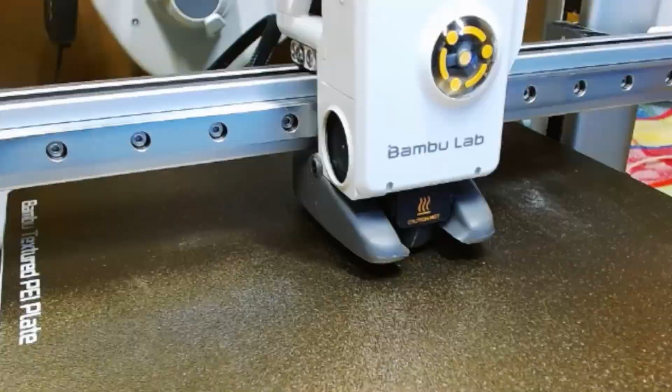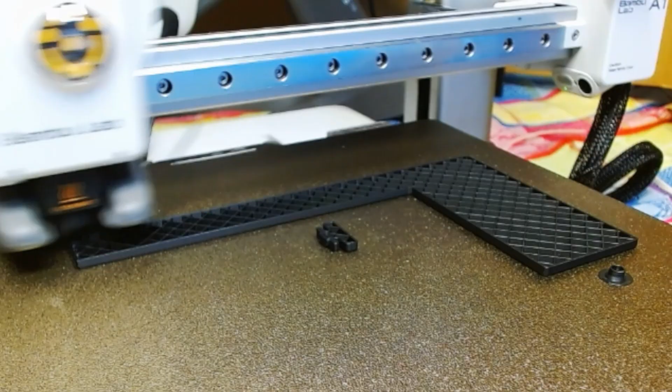I was talking with my brother the other day about how difficult it is to show a 3D printer print on video. At full speed, everything is moving too fast to really understand what's happening. Mounting the camera to the printer bed fixes that. Now the print head is the only thing that looks alive.

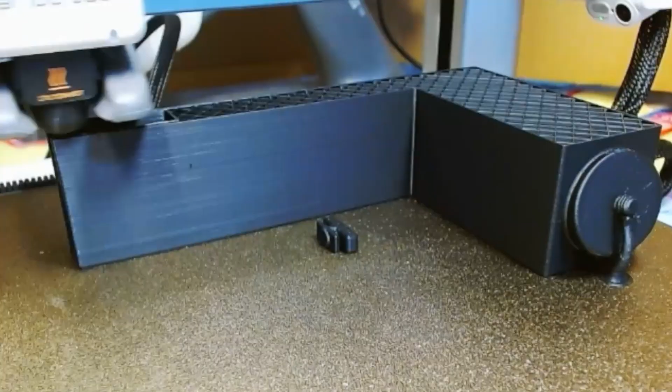On the Bambu Lab A1, a pin slides into the front left underside of the bed. The mount slides into place. The pin holds it there, and friction does the thinking. No force required. That detail sets the rules. So before designing a camera mount, I designed a question. The first version isn't about the camera at all.

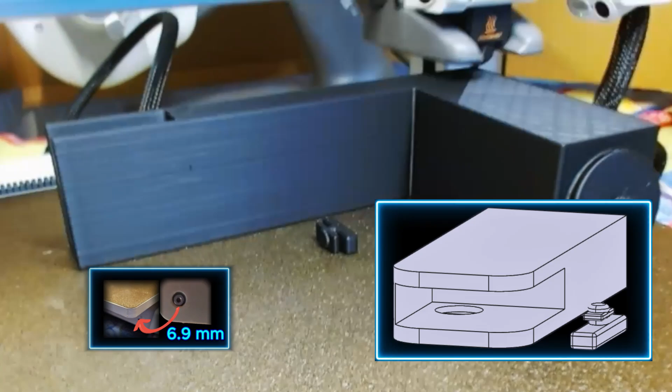It's just a box. A simple rectangular base with a slot along the front edge. That slot is the experiment. It exists to see if the part slides in cleanly, locks into the corner the way it should, and stays put once the bed starts heating and moving. No angles, no adjustments, no camera in sight.

This print is fast, disposable, and brutally honest. If it fits, we move forward. If it doesn't, we learn why. Because in good design, you don't start by adding features. You start by making sure the part belongs exactly where you're about to put it.

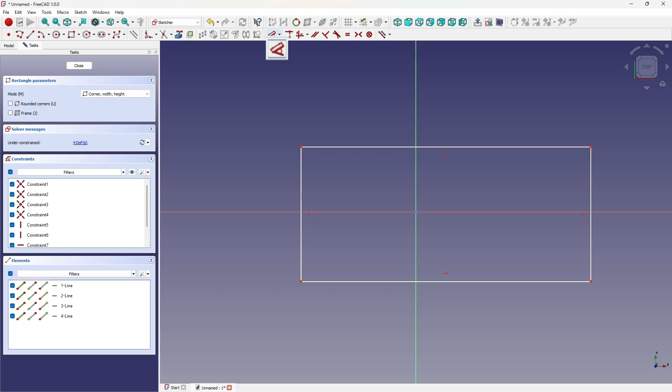We start with a rectangle, but not just any rectangle. This one knows where it lives. Centered on the origin, anchored to the axes, calm and intentional. Nothing floats, nothing guesses. Every corner is invited to the party by symmetry, not by chance. Then comes the first decision that matters. One number to rule them all.

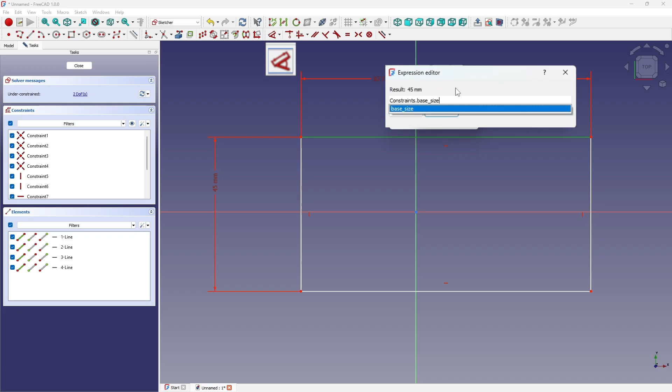45 millimeters, not because it's magical, but because it's named. The moment we call it base_size, the sketch stops being geometry and starts being a system. From here on out, everything listens to that value. Width isn't typed, height isn't remembered, they're derived, quietly, reliably. Expressions slip in next, not flashy, just precise. 2.5 times the base.

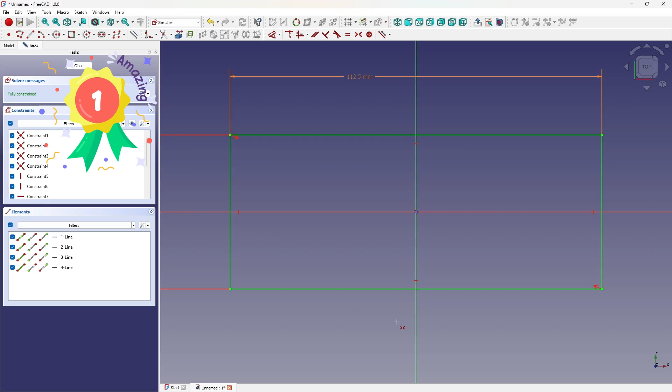Dimensions stop being measurements and start being relationships. You're not drawing a shape anymore. You're defining behavior. And then the sketch stretches. Cleanly. Predictably. The top edge reaches its full span, perfectly centered. The solver nods. Still green. Still happy. Now we soften it.

A corner gives way to an arc. Not decorative, but deliberate. Tangent on both sides. Radius tied back to the same shared language as the rest of the sketch. No rogue numbers, no one-offs. The curve belongs here because it fits the logic, not because it looks nice. More expressions, same story. The radius isn't chosen, it's inherited.

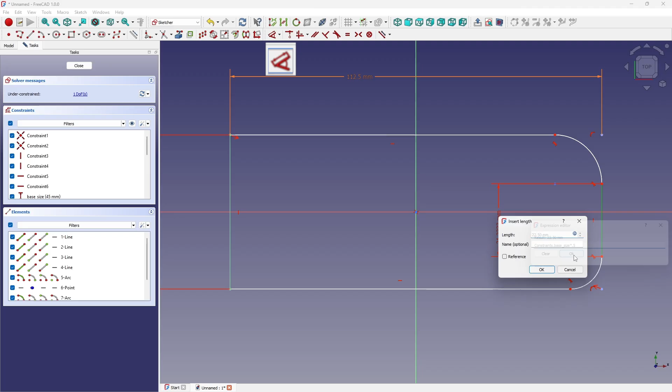A few red arrows flash as constraints fall into place. The sketch resists for half a second, then yields. Everything locks. Degrees of freedom drop to 0. And there it is, fully constrained, not frozen, resolved. This is the quiet win moment in FreeCAD.

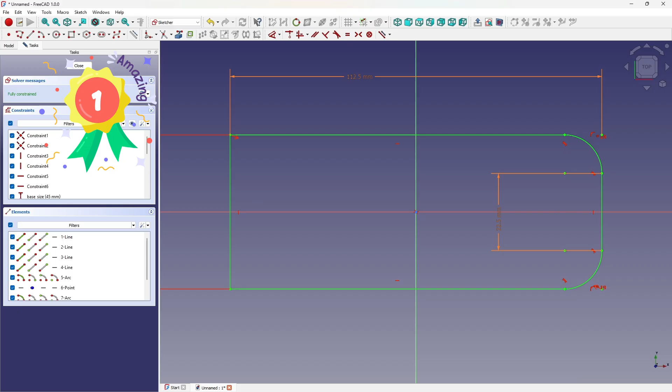When the solver says fully constrained, what it really means is, I understand what you meant. No guessing, no surprises later in Part Design. Just a sketch that knows who it is, where it is, and how it scales when you change your mind. That's not just drawing, that's design.

All right, now the block becomes useful. We start by giving the sketch some depth. Nothing fancy here, a straight pad, 22 millimeters, just enough mass to feel intentional, not bulky. This is the moment where the 2D logic finally stands up and becomes a real object. You can rotate it, catch the light. It exists now. But this isn't just a block.

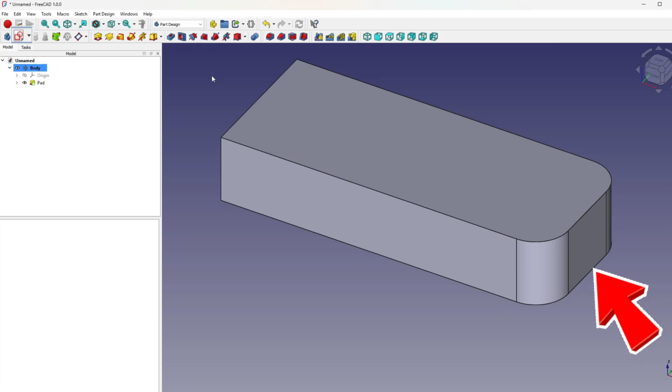It needs to dock. So we flip back into Sketcher, this time on the end face, the one that's going to meet the printer bed. We ground the sketch with external geometry. The moment the sketch opens on that end face, we pull the edges of the solid straight into Sketcher. They light up in purple, not as decoration, but as a contract. This is the handshake between sketch and solid.

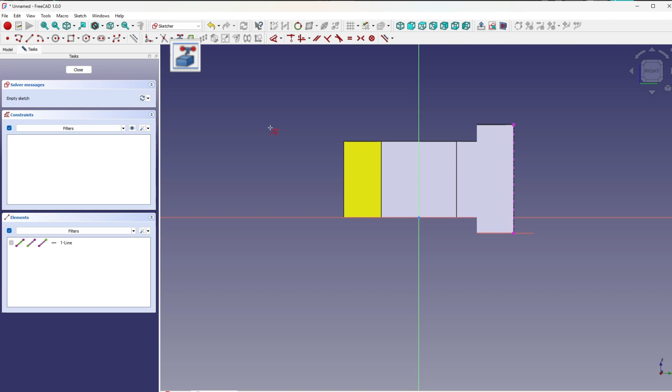From here on out, nothing floats, nothing drifts. The geometry is attached to something real. With those references in place, we draw the slot rectangle and attach it directly to the external geometry. Not eyeballed, not implied, constrained. The sketch isn't guessing where the face is, it's responding to it.

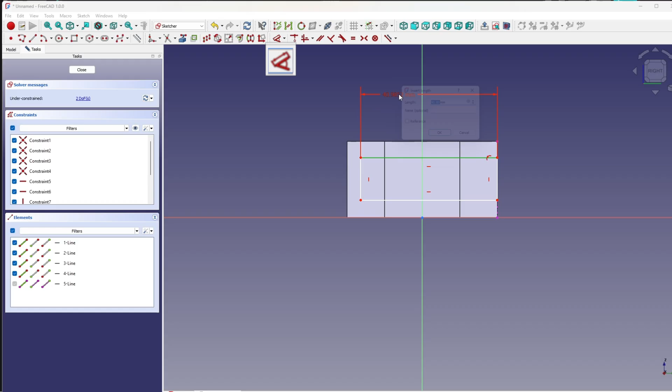Now we're ready to give the square some dimensions, starting with width. Width isn't measured, it's derived. Expressions pull it from the base value, keeping the slot in proportion no matter how the model changes.

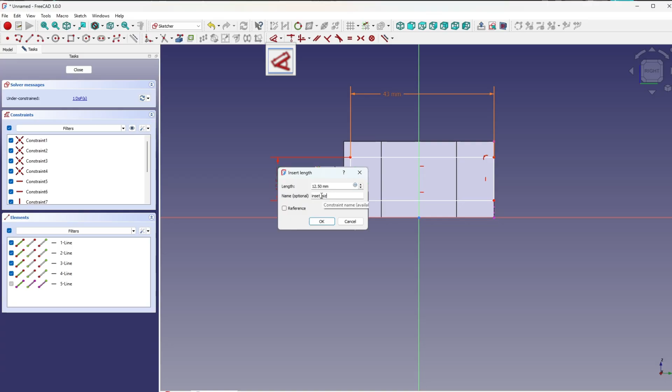The depth is where theory meets plastic. The printer bed is 13 millimeters thick, but printers don't care about theory. Plastic expands, layers stack, and friction always shows up uninvited. So we shave half a millimeter off and land at 12.5 millimeters. Snug, intentional, forgiving. Now we add a construction line.

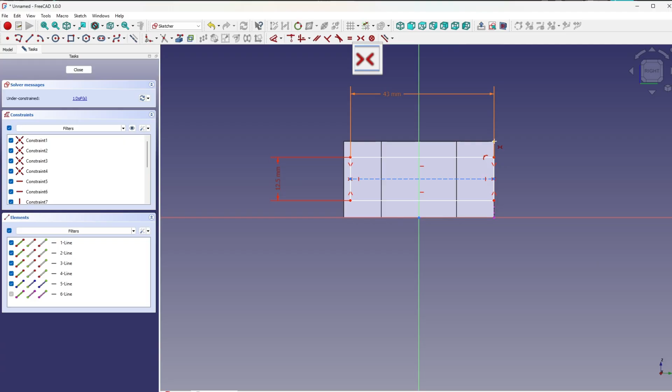Because it's created inside the slot rectangle, FreeCAD automatically drops it dead center. No extra constraints needed. It's already centered within the square. The only thing left to do is tie that center line back to the external geometry, so the slot isn't just centered in the sketch, but centered on the part itself. A couple of constraints later, the solver turns green, fully constrained.

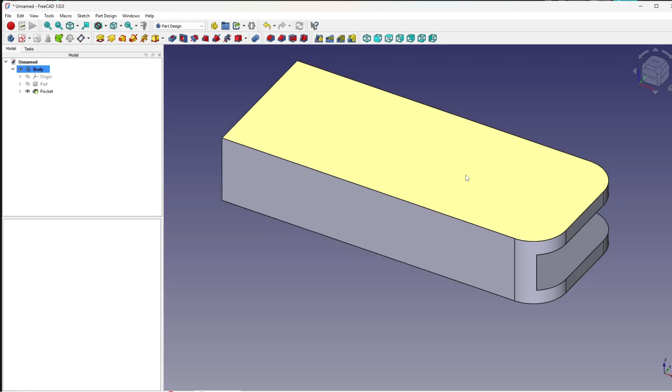Close the sketch and perform the cut. A clean pocket straight into the body. And when it's done, this isn't just a padded block anymore. It's a part with intent. A slot that knows its size, its position, and exactly what it's meant to hold.

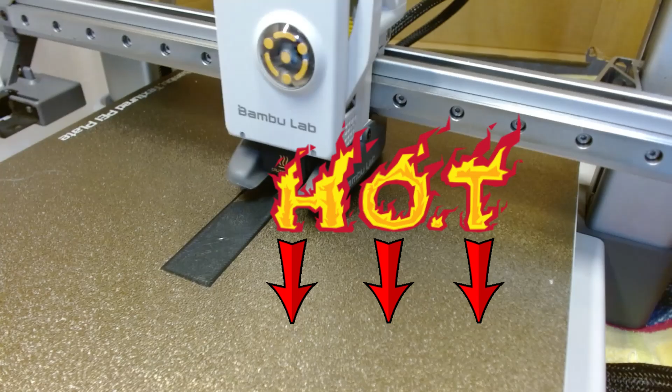After printing the test block, the experiment moved from theory to thermodynamics. The geometry was right, the fit was tight, the slot behaved exactly the way the model said it would. And then the heat made its entrance. Energy transfer was expected. A heated bed at temperature is not subtle. What wasn't anticipated was persistence. The bed didn't just warm the contact area, it fed it, constantly, patiently, relentlessly.

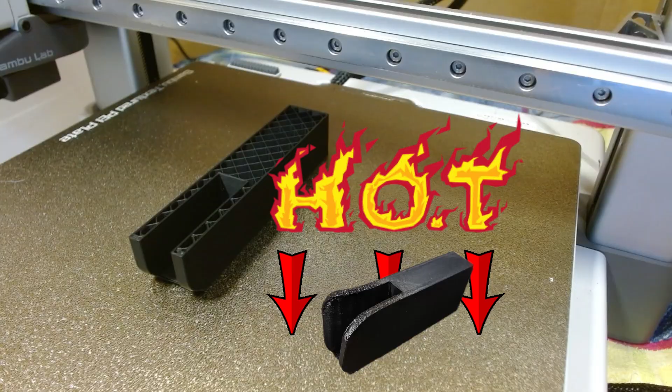And plastic, under sustained thermal load, tells the truth. The material softened beyond expectation. Cohesion weakened. Structural confidence faded. The edges didn't gently distort, they surrendered. Warping wasn't a rounding error, it was dramatic. This wasn't a mistake in measurement, it was a miscalculation in energy.

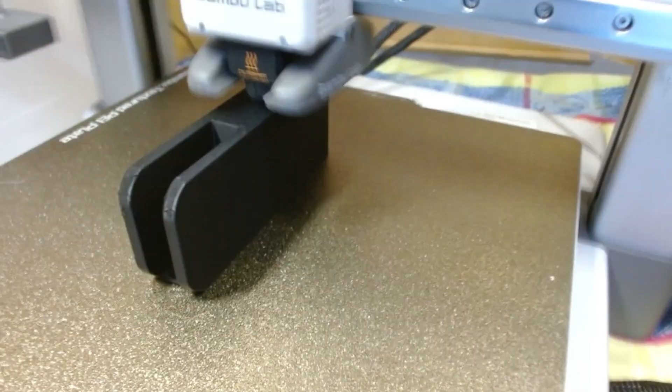The heated bed behaved like a thermal reservoir, and the mount became its conduit. So the solution wasn't tighter tolerances, the solution was interrupting the physics. The part was redesigned to include a deliberate cavity, a narrow channel sized for thin cardboard strips. Nothing high-tech, just cellulose standing between sustained heat and structural integrity. A thermal break, a pause in the energy transfer.

Same geometry, new understanding. With that small thermal break in place, performance shifted immediately. The insulation disrupted the energy flow. Rigidity held. Warping stopped being the headline. Stability returned. Because sometimes the fix isn't redesigning the structure. It's controlling the environment the structure lives in.

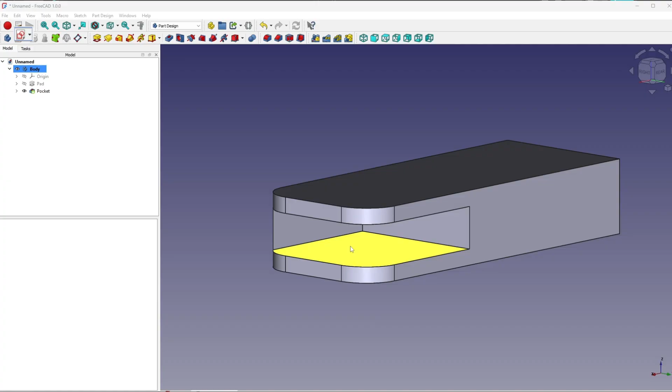Now that the issue has been identified, it's time to create the thermal break. A new sketch attaches to the lower interior surface of the cavity. External geometry comes in first. Front, back, and sides. Every edge is projected into the sketch as purple reference lines. Those lines define the cavity.

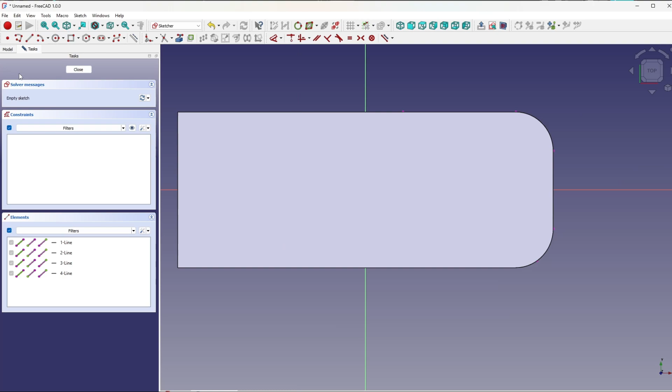Not assumed, defined. To make the interior readable, the body is temporarily hidden. One click on the visibility icon in the model tree, and the solid disappears. The view clears instantly. Just constraints and intent. Inside a cavity, clarity is control. The side edges anchor the insulation rectangle directly. The front and back remain as reference guardrails. Visual confirmation that spacing is deliberate and symmetric.

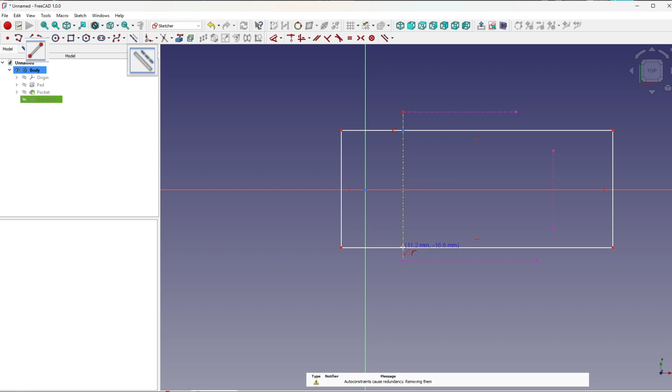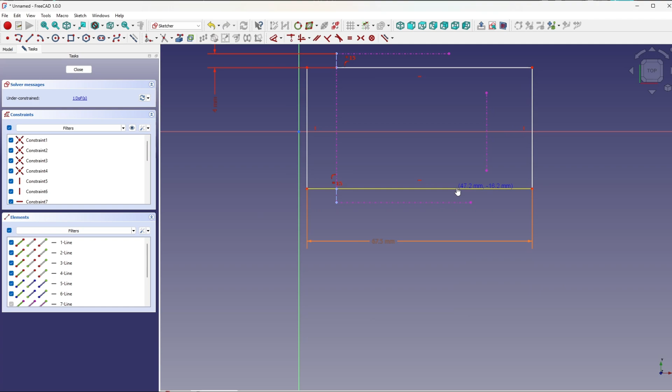Nothing floats. The insulation channel forms as a rectangle positioned 4 millimeters in from the cavity edges. The sides are constrained to the external geometry. Placement is deliberate, precise. Dimensions are expression-driven, tied back to the base size from the first sketch. One master value, everything else responds. Change the base, and the insulation adjusts automatically. The solver turns green, fully constrained.

A shallow pocket carves the first channel along the lower edge, just deep enough to accept a strip of cardboard. But this isn't a straight cut. A 45-degree taper angle is applied to the pocket walls. 45 degrees. Not decorative, strategic. That taper turns the channel into a wedge. When the cardboard slides in, it doesn't simply rest in place. It grips. It locks itself in through geometry alone.

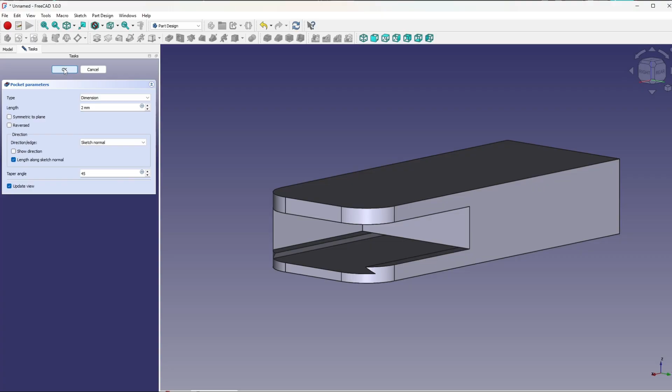This is one of those features hiding in plain sight inside the pocket tool. Most people use it to remove material. Few use it to shape behavior. That tiny angle transforms a slot into a retention system. Geometry with attitude. Once the lower channel is in place, symmetry becomes inevitable. Heat doesn't care which side it approaches from.

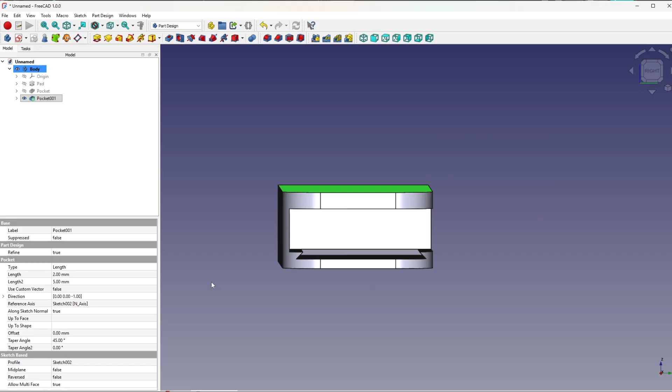In FreeCAD, mirroring requires a reference, an axis, a face, or a plane. Our feature does not sit on a global axis, and the cavity is internal, so there is no natural surface to mirror across. Rather than sketch the feature twice, we introduce a datum plane to establish a clean mirror reference through the part's center. One feature, reflected once, perfectly aligned.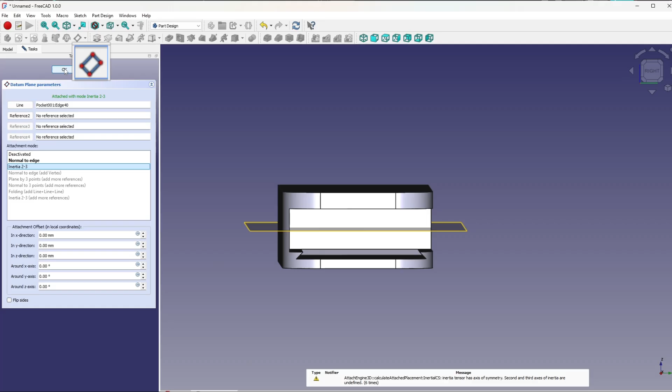My first instinct is to attach that plane using inertia 2 to 3. On paper, it sounds perfect. That attachment mode calculates the body's center of mass and places the plane directly through it, the true balance point of the part. We let the model find its own middle. Elegant, automatic. It is physics-driven, and that matters. The plane aligns to the principal axes of the body's mass distribution.

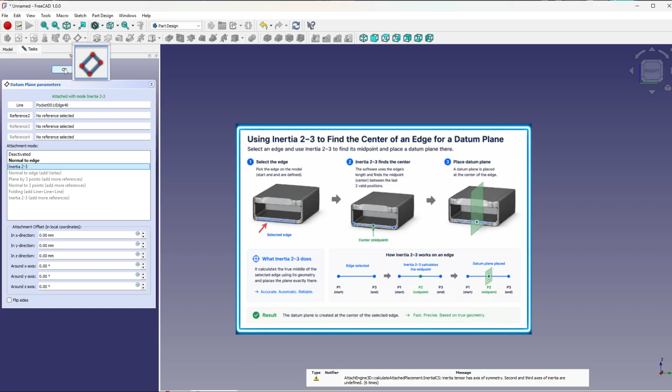If the geometry is perfectly symmetric, FreeCAD may display a warning that certain inertia axes are undefined, not because the plane has failed, but because symmetry makes some rotational directions mathematically interchangeable. The center location remains valid. In our case, that center is exactly what we need. The plane passes cleanly through the part. It serves perfectly as a mirror reference. Understanding what the warning means allows us to use the method confidently, rather than avoid it.

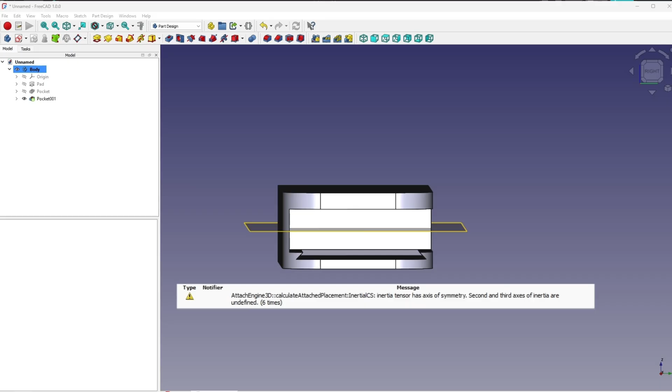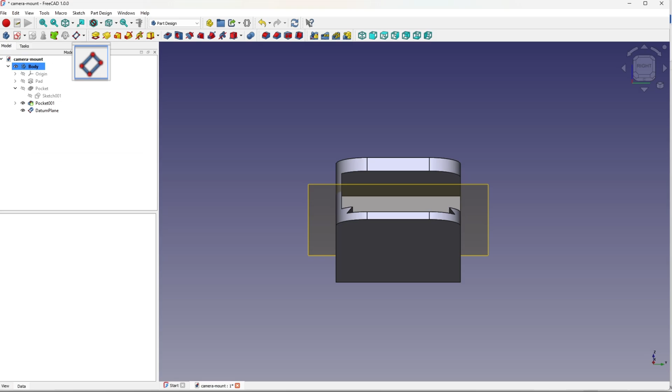Or, if you prefer to play it safe, the datum plane can be defined purely by geometry. We attach it to the bottom face of the base pad, drive its attachment offset with an expression equal to half of the base pad's length, then enable the flip sides option to center the plane. Now the model finds its own middle, not by balance, not by weight, but by the quiet authority of its governing dimension.

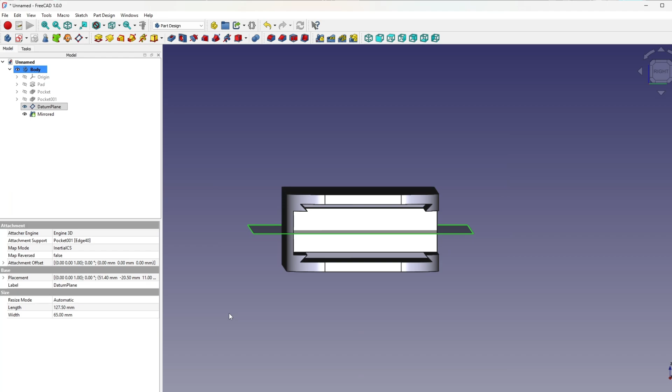Insulation channels now exist on both the top and bottom of the cavity, centered, aligned, and driven by the same base dimension. The thermal path is interrupted from both directions. Energy still exists. It just no longer gets a straight line. When heat becomes the villain, the hero isn't thickness, it's strategy. And this time, geometry wins.

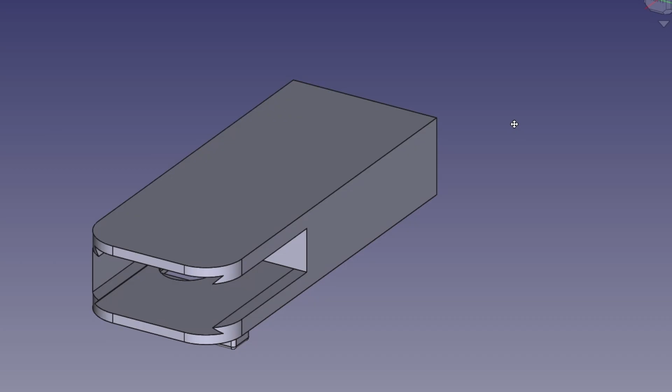And this brings us to a good place to pause. The base fits, the slot works. The heat problem showed up, caused trouble, then got outsmarted by cardboard and intentional geometry. At this stage, it is still only the foundation. A fitted block, a protected cavity, a thermal path interrupted before it can cause trouble. It can sit where it belongs, but it can still move around.

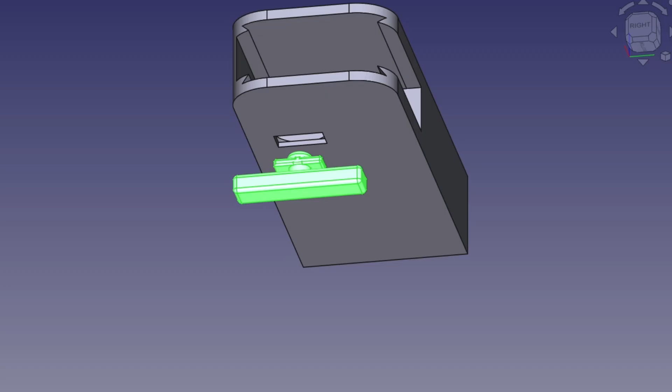Next time, the peg system takes over. The printer's own screw hole becomes the reference point. The locking feature gets built into the mount, turning this fitted block into something that can hold its position. After that, the camera mount finally gets its purpose, holding the camera. So for now, this is where the build pauses.